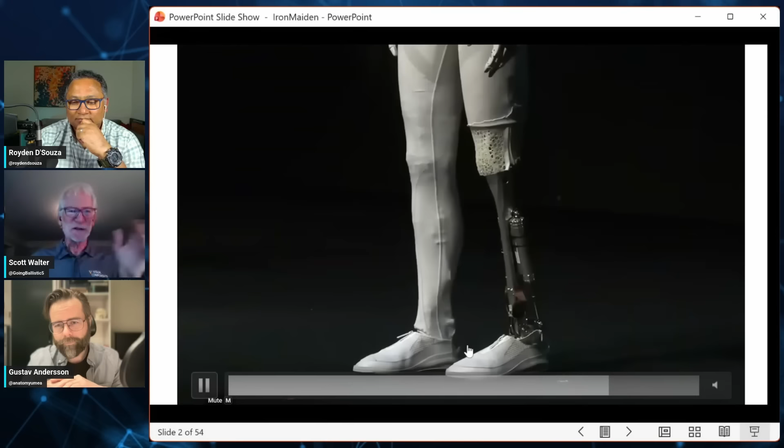You can find this on YouTube - just search XPeng, X-P-E-N-G, and you'll be able to find the keynote and also what they did the next day, showing this.

So yeah, there we go, going ahead and walking off. So the bot's still able to work even with the skin removed.

When they showed it last spring, I think it was, there was a short view of the older version walking, and I was really impressed back then as well. So when I saw this, I thought it seems like a reasonable development.

It's very impressive. The original one was revealed almost exactly a year to this date, so it seems like they always do this on the same day. That bot was just beautiful - aesthetically very beautiful, and the movements of it, everything, were all very good.

It definitely strutted around like a peacock, there was no doubt about it. It just knows it's one of the best walking bots out there as far as convincing goes. It's very fast - we haven't seen it go really quickly, but when it moves, it commands the room, no doubt about it.

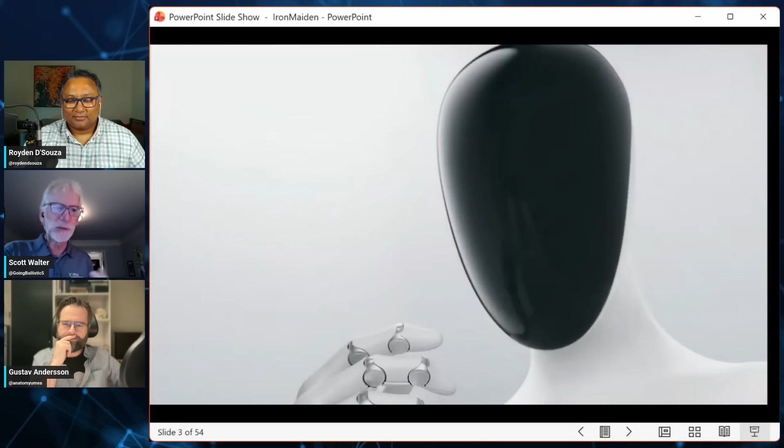And now the Iron Maiden here is doing the same thing. This is the reveal they then had of showing what's inside. Now, this is all CGI, and this is why it makes you think - okay, everything could be in design, but where are they on the hardware?

The first thing we're going to see, and we'll get into this shortly, obviously the hands - there's going to be a lot to talk about those hands because they look very human-like. We can see those are not the same hands as the walking bots - they're very different. We don't really have much detail on the hands yet, but if they actually pull that off, those are going to be very impressive hands.

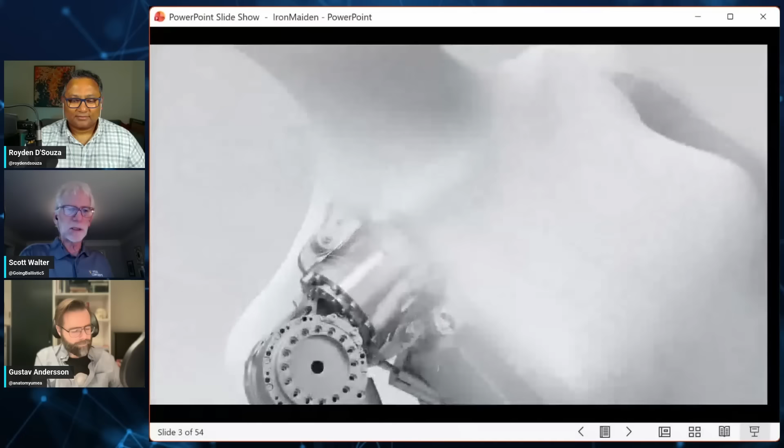We're getting an idea of what's going on underneath the skin, and it's pretty impressive just from the CGI. And of course, it doesn't hurt to be able to see some of the hardware itself, and that's what we're going to get into to figure out what's next. This was like a 3-hour presentation in which maybe 20 minutes was just about the robot - they've got so many other products.

They talked about not a flying car, but basically a type of copter, I guess you could say an eVTOL, that they've been working on as well. So that's also exciting. Yeah, I mean, there's definitely a lot of things.

And of course, just a little bit of background: they also produce EVs and they are working on an FSD kind of chip and believe they're also very close to having robotaxis and autonomy. Their chip, which they call the Turing chip, good name, is the same one they're using in their car and here. So we can see a lot of parallels with Tesla as well, which I found really interesting because it has a lot of echoes of Tesla in the vertical.

Yeah, absolutely. Vertically integrated. But to their credit, they have been working on this humanoid bot project way before Tesla even announced it. I think they started maybe in 2019 or even earlier. So they've been thinking about this problem for a while as well. Does it have the AI in place? Well, that's the thing.

They're working on the same autonomy for cars, and they are also developing their own chip, which might be similar to, I don't know, FSD 2 or 3, we don't know what the level is, but they're doing the same thing. There is this controversy that someone sold the old Autopilot code to XPeng back in the day. It's a claim, possible.

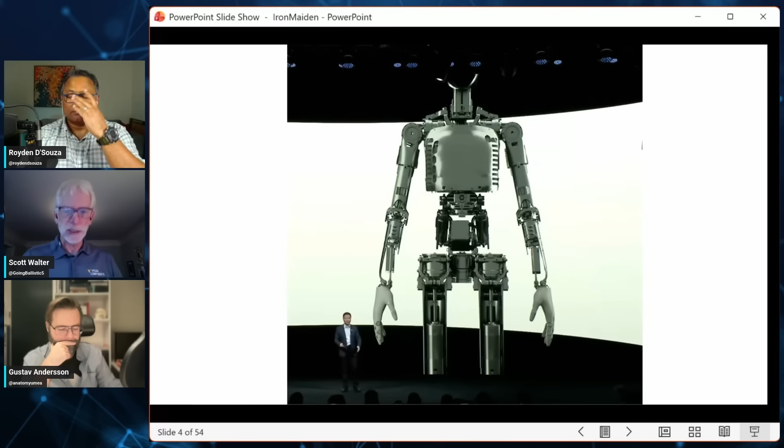So I took one of the frames, made it transparent, and put it over. And you could say, oh yeah, you could probably fit it in there with more than enough room for padding everything, and it would be very hard to see any of the underlying mechanical structure. So I was pretty convinced at that point that it's not a person in there. My only question was whether it was the old one or the new one, and the old one could almost fit in there as well.

It was very close. So before we go too far, I want to refer to a principle that I coined back in the spring that I call the in-out principle. There's the best part is no part and all that, but how do you decide when a part is needed or not? So this is one more level. The idea of in-out is keep it in or toss it out. You try to categorize the function something provides along these five guidelines.

First, the I is indispensable. You take it out, it just won't function. It's like, let's take the engine out of the rocket and see if it works. No, it's indispensable. Sorry, you're going to have a rocket engine in there if you want it to work.

Needed: it will function, but it will severely limit the ability. So there could be things where you find we don't really need a knee in our humanoid robots. They could still walk without it. But it won't be able to go upstairs or down on level.

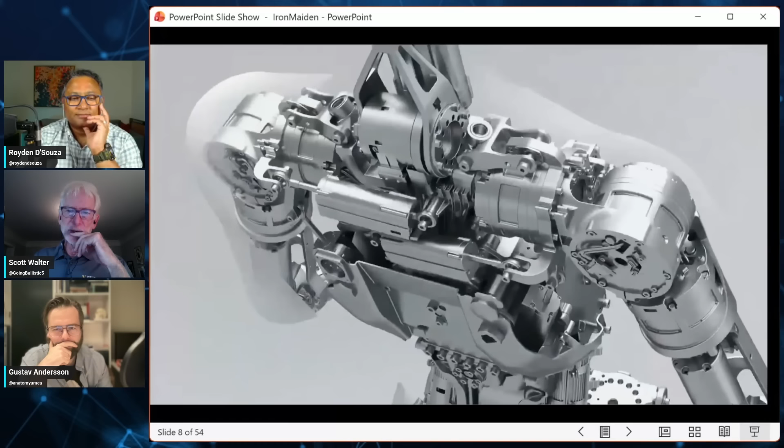Well, not quite. So if we go to the next image I have here, which is the first one where we're going to start, this is quite an interesting mechanism that's in there. You're looking at it, and the first thing is like, wait a minute, what's going on here? I'm working the animation forwards and backwards, so you kind of see what's going on. So we are not seeing the standard shoulder motion here.

We are seeing what is effectively like the clavicle or the scapula kind of moving around or together. So primarily elevation and depression, I'd say. And maybe a little bit of rotation, but you can't really... Yeah, it should be able to kind of. It's hard to tell. Yeah.

Now, if you look at this, can you see the mechanism that allows that, or where the actuator is for that? Yeah, so they're in the back, right, where we would keep our rhomboids, as the muscles are called, but they are not at the same level, which maybe it's okay. I don't know. Well, it means there's an asymmetry, which means one side might perform a little bit better than the other, which means you'll have a dominant arm, like us humans have. But they had absolutely no choice to be able to do it.

However, there's actually one more joint here that may not be seen. So one of them is obvious. Yes. Is that a limitation of the size of these actuators right now? Well, part of it could be the stroke. If they require a certain stroke, we have to make it this long because the motor probably has to be almost twice the length of the stroke that you're going to need. Right. Because you've got all these other things in there. So if you need like a 2-inch stroke, it means you need 4, and that's just how it is. The other could also be, obviously, torque density, stuff like that can also change other things. But when you're going to a linear one, it's a little bit different.

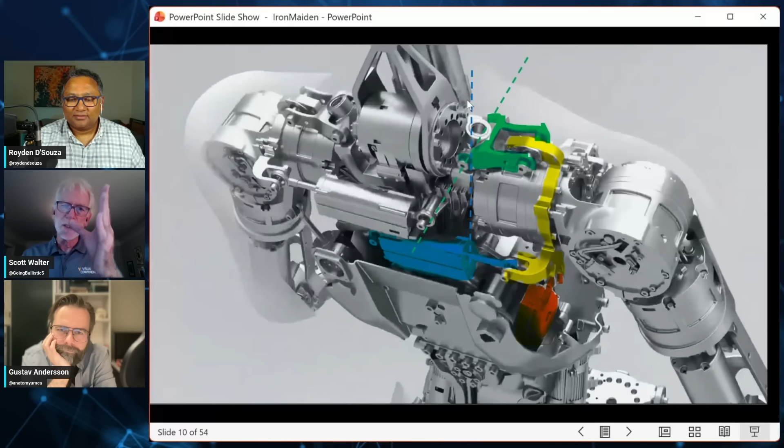But if you look underneath it, you can kind of see that part of that is this linkage mechanism that has an axis on the top, and there's going to be one on the bottom that's a little harder to see from the other side, but it's probably down here somewhere. So it does the hug around there, and then the shrug about the green, up and down. And now let's go. This is definitely not an I or an N. Okay.

Maybe we can class it; it's definitely O for sure. You know, it's something that's optional, but you can argue, maybe is it more like U or T? Is it useless or toxic? Because when you look at all the additional stuff that has to go in there, that's payload and mass and complexity that, if it doesn't have any value, does it degrade from it or not? For me, is it toxic or is it useless?

Because for me, I don't know, it's just so crowded. I have serious questions about the range of motion. Yeah, and if one of those goes out of alignment, you've got a lot of problems. Right, but is it more than just shrugging? Is it just about emotion? So hey, our robot can do the shrug emoji now. Is it about that, or is there more value to it? Gustav, you can probably answer that.

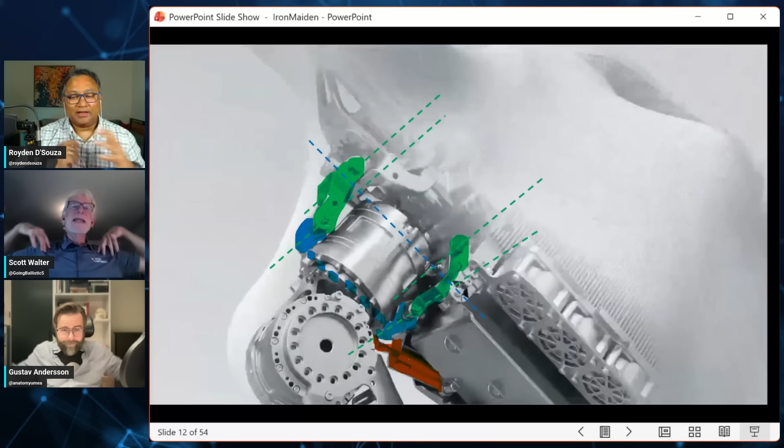Yeah, I'm in the in camp on this one. I mean, you need to reach forward and throw the ball to your kid. You need your scapular movement, and there are conditions where we put the Belgian beer glass in the top cupboard, at the top of the shelf, without having to get up on a step stool. So we haven't really seen whether or not it can do these movements, though. Can it really do this? Yes, but from the standpoint, we have them as humans, and they have value to us.

And the thing is, I ask this question to every single roboticist I meet. My famous questions: which axis would you take away if it was too costly and you had to get rid of one, and which one would you add if you could do it for free? And just about every one of them says scapula. They would love to have a scapula, but they do feel that it's kind of parasitic overall and difficult. But they appreciate the whole point of the scapula.

Now, if I was into robot boxing and designing one for that league, I would put a scapula in there. Not so much that it'd give me a punch, but I might design a scapula which is compliant, so that when I take a punch, it absorbs the energy rather than having it resonate through my whole structure. That might be part of the reason why we have scapulas, but the main purpose is it extends your reach, and could also get you a little bit out of singularity in some locations. So it's not useless in that sense. It is optional because it does provide some benefit, and it would be nice to have because it would make life easier. So that's where I am.

But Royden, this is the whole thing about it. It's not like there's any right and wrong answer. It's about stating your case and why you think it is. And it's what every engineer should be debating when looking through these things: you make your case on why you think it's parasitic. And maybe other people will go, oh yeah, it is kind of making life easier, but boy, I didn't realize there is something degrading the performance overall, and maybe I really don't need it and can do it some other way.

And also, their plan, at least in the short term, is more like welcoming people into the showrooms, and maybe not actually doing heavy lifting and heavy work. It will be more of an expression part, or give me a hug or whatever. Whereas if they're going to lift heavy stuff all day long, it's probably going to be one of the things that breaks quite quickly. Exactly. Because it's going to support everything, so you have to over-engineer it. And remember, it's at the very top of the chain, so it's carrying the entire arm.

All the load of the arm is going to transfer, which is probably why they have those linkages. And they could make those linkages pretty strong. These 4-bar linkages will help, and that's why the actuators there are also pretty robust. They're linear actuators that will be able to give the stiffness that you need. But that takes space, that takes mass, and that mass means it's going to be less safe, right?

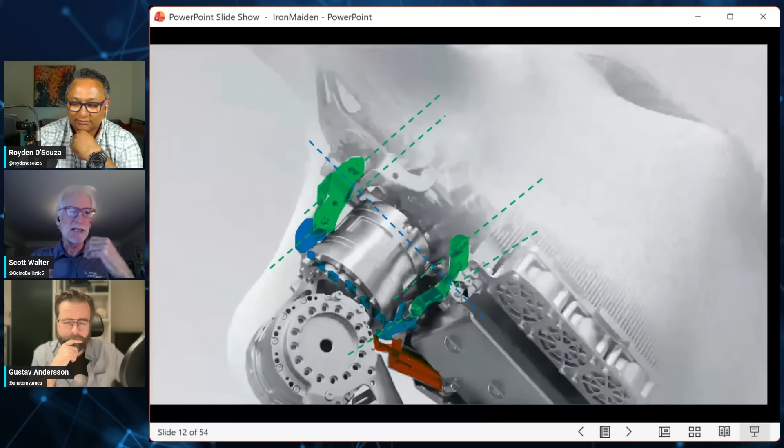So now this is not the first one. I think it's been over a year. There's another Chinese bot out there called TLI bot that I discovered. Someone sent me a link like 2 weeks ago. I looked at it and I'm like, oh wow, holy cow, it's got the scapula, and it had 2 degrees of freedom there as well. Range a little bit different, but still a similar idea. So this is not the first one, and a lot of them are looking at it.

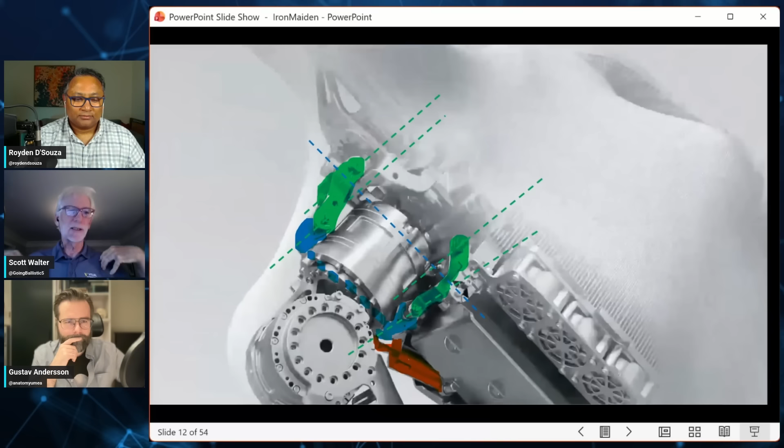I think DLR had something, but it might have been an 8-axis one, as well as KIT, Karlsruhe Institute of Technology in Germany. Both those German institutes. Well, DLR is an aerospace group, basically a German version of NASA. And they also had kind of a scapula light, I guess you would say, that they were able to get to do more or less the hug as opposed to the shrug. Because for many cases, that's what everyone wants to do, is to be able to reach forward.

So moving on, we can take one last view here to get an idea of exactly what, I guess, would you call that the clavicle that's sort of out there? Or I guess that would be the equivalent of the clavicle at the front. Yeah, kind of looks like it, which gives you that nice shape, especially that bodybuilder shape that someone like Arnold or others would have when they get that all developed. Exactly. But the other reason I was looking at it is I'm now going to pivot.

Okay, so I have a question at this point for Gustav specifically, because we keep comparing these bots to the human body, because they're humanoid bots. So there's a lot of features in our skeletal system that have evolved because they're also protecting a lot of parts like our nervous system, our circulatory system, organs, soft organs.

So the entire upper structure with our shoulder blades, our clavicle, our rib cage is also a product of evolution, because it needed to evolve in order to protect the fine, soft, tender organs and other parts of our body which really get us working, which is not needed in bots. Exactly. So you have to be careful how much biomimicry you do.

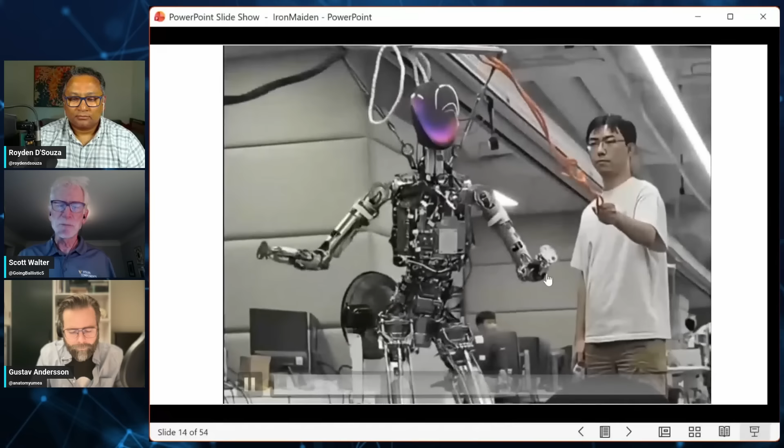A lot of it is like trying to find where the head actuators are. So I think if we look at this video here, this is the closest video that's able to show where there was some movement of the head. And it's hard to really tell because the body's moving as well.

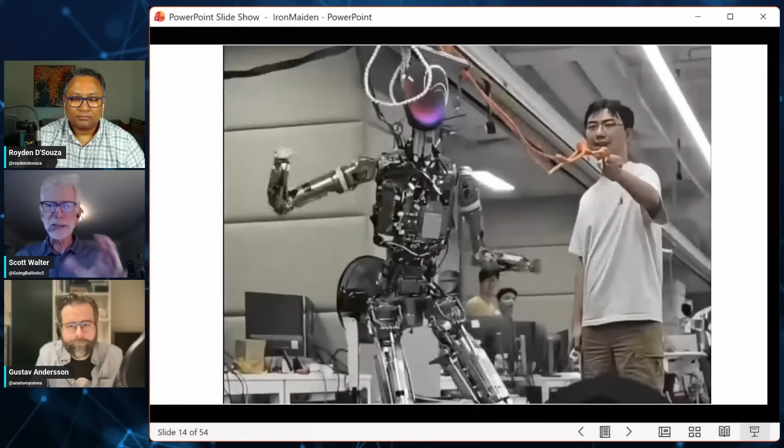You're not sure if you're seeing the head move because the body is moving or not. But I think I see the head definitely doing the X back and forth, which would be that side to side nodding or the maybe. And then I think I might see it rotating in the Z up in the cranium, not necessarily down at the neck. Hopefully I'm not being fooled, because that's kind of changed my calculus and thoughts of what's going on, but it's made me even more confused.

I don't see the chin moving up and down so much on the Y axis, but it can do it. It could be an optical illusion, because there's another one where you can see the chin going around. So it depends on where you want the pivots - do you want all the rotation in the head, or do you want it to move around? We're going to see that the rotation you're looking at is looking forward. The chin may not go down, but the whole neck can because of the rotation.

But first I want to focus on the Z. Right down here where I highlighted it, it looks like there could be an actuator down in there, which I could not see from other views. I looked at it, it's there, but it means it's probably buried way down. Hopefully it's not taking up space, or is that just an attachment point? I'm not 100% certain, and right now I'm leaning towards not being sure about that rotating there, because it appeared like the rotation was happening up high and not down low.

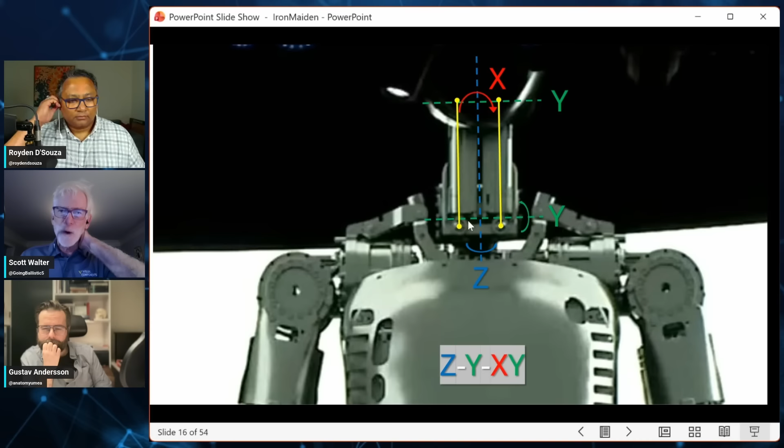So this is sort of what I think it has - it's got a rotation along the Y here, and that's clear. We're going to see that actuator that sticks out. I'm not sure about this one here, and we see what appears to be two linear axes going on up there. You can make scaffolding and structure that's a lot thinner and doesn't look so hefty. The only reason you wouldn't is you're doing the same trick as with the wrist and ankles - you've got a cardan joint up there that gives you two rotations. The rotation would be a second one in the Y, and also the X would be nice to have.

So it's like, okay, that's interesting - and then they must have the Z down there. So I thought it was a 4-axis joint. But one of the reasons I don't think it's 4 axes is once you add up all the degrees of freedom, I come up with 83 DOFs, and they're saying it's only 82. So that means - and all the other DOFs I'm 100% sure about, except here - it probably is only 3 DOF, and it's doing the Z rotation up there.

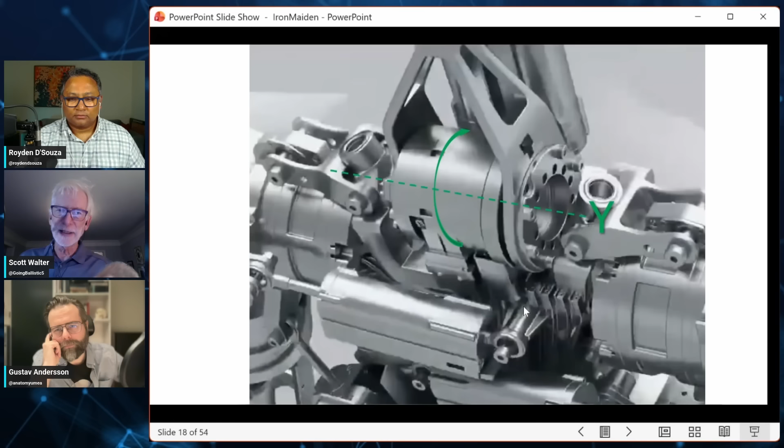Yeah, so we'll look at some of the other pictures here. I'll take that away so we can see a little bit of the highlighting in here. So when we go and look around, we'll see the others - is it the same actuator? You see the dark slot on this actuator that's further down, that's moving the scapula. It looks like what you're having in the neck. So the dark slot - yeah, it looks like that. It looks like one of those, exactly.

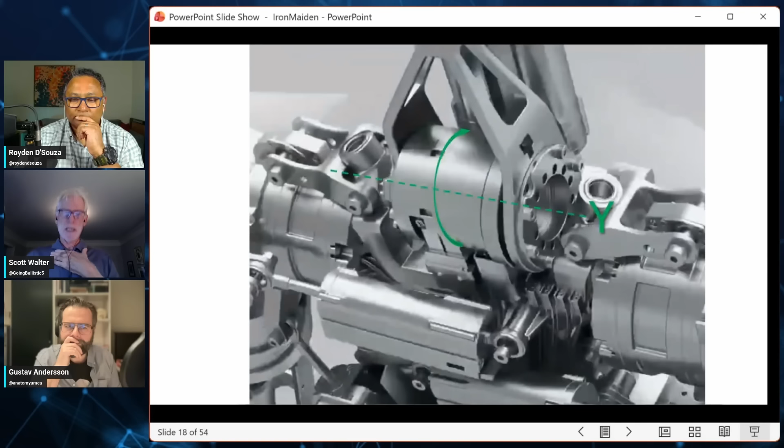So it kind of looks like this - you can see this big actuator here. That's the Y, that's the one making the head lean forward, and that makes sense. I don't think you really want your head to go down like this, because you don't want to bury your chin in your neck to look down. You want to crane over a little bit, so your field of view is a little better. But that's a big actuator - look at the size of that thing. It's built to carry something massive, and your head should not be that massive. That's a pretty big one.

And again, I was looking down here and I could not really see another actuator for that Z rotation, and I think that front view was tricking me a little bit into thinking that. So when you go over to here, really - again, I don't quite see what's going on there. And you're looking at that, and it's like, again, I see two linear actuators.

I see what looks like maybe a Heim joint or a pin joint there. Could be just that they're a pin joint, and it's pretty big if it's a linear axis. So I'm kind of highlighting what's there for you to get an idea of what possibly could be there. So I could be fooled a little bit.

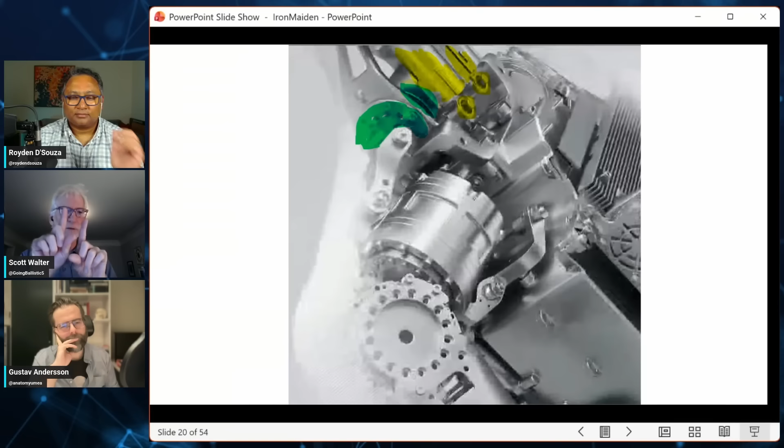There's a couple of ways they could be doing it. It's not really a quadrilateral that they're having for it, or you could just actuate one side. One could be a dummy, just going up for some reason to give you that X back and forth. And then it's got a big actuator in there, which is the one that's rotating around, which is why that Z or Y actuator has to be so big, because it's carrying a heavy neck and something heavy in the head. Who knows if they've got other processing or stuff in the head that also adds a little bit of mass.

So I was just looking at that overall and a bit confused. I'm going to lean towards they've got a Z rotation in the head, though I can't confirm it because I can't see it, and they're doing something tricky to get the X. But this yellow part there is kind of throwing me off. Well played - we can see it's a pin joint there that they're actually able to get something out of, and I can't figure it out. So bravo to the XPeng engineering team. I go down in defeat.

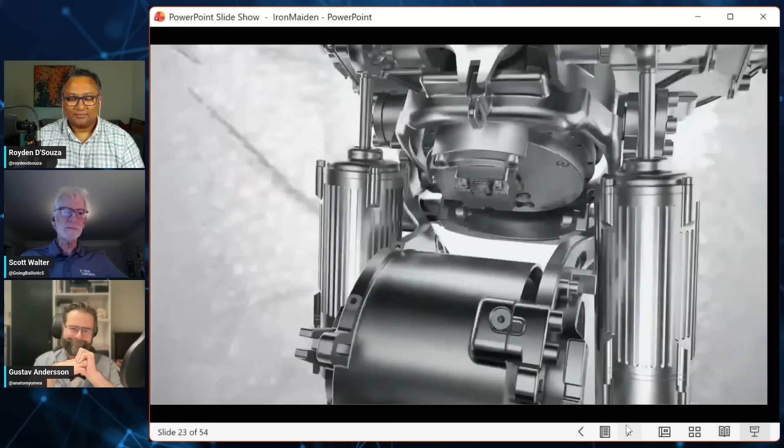And again, so we can kind of see what could be going on there, the kind of rotation that's happening up there. Now let's move on to, if we want to start talking about in and out right now, this gets wild. Because this is the waist. That's some serious hardware. Yes, this is the waist.

So let's take a look again, showing how the waist is going on. Now I'm going to let it run long enough that you guys, and hopefully our viewers, will be so familiar with this kind of mechanism. You've seen something like this more than enough times. Is this a kidney style waist?

I mean, what would happen if you only actuate one? So the kidney style waist is technically an RSU - rotational spherical universal - which means they're using rotational actuators for the kidneys, because the kidneys are like these nice little round things up there. Do you see any rotational axes there, actuators right now? It's if they are very high up in the image. Yeah, I mean, that's the only place I could imagine that it's at. Well, they're there, but there's something else.

But we definitely see linear actuators. And as we go through, I'm going to contrast it to the old one. So what I want you to see, there's a bunch of things going on here that I think are really going to get pointed out. The first big structure you can see in the metal is basically a cross that's in there. That is like your universal joint or your cardan joint right there, which has two axes, which I'll highlight. And then you have the actuators on the side, which aren't going differential right now, so you can only really see one motion. But when it does the movement, it's exposing another actuator that will be pretty obvious, and also one that's down here.

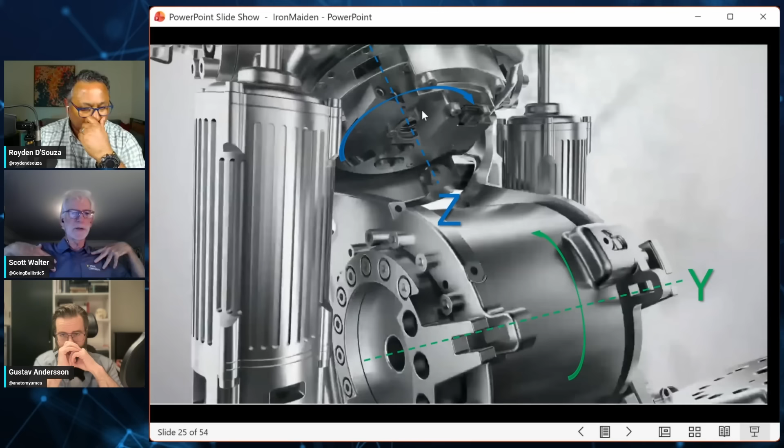The motion we saw was purely these linear actuators on the side. And so this is the parallel actuation strategy that is giving us a couple degrees of freedom. So what we can see is that green actuator that was down there is giving this Y rotation, which is basically allowing the bot to lean forward. And then you get this Z actuator, which is taking the upper part of the torso and rotating the whole upper part of the torso.

Now we have to take this probably a little bit further and actually look at the overall structure, because there's yet another Z actuator that we couldn't see in there, and that's way down here in the pelvis. So down here in the pelvis is a Z actuator. Here's that Y actuator that we were looking at. We get the parallel actuation, which creates an X rotation about that cardan joint, and also the Y. Basically, we were seeing the Y, we were not seeing the X, and then a Z up there.

So now look at this. So this is my serial parallel notation. So it's Z-Y-XY-Z. So how many letters are there? 5. Of all the waists, I think the one with the most degrees of freedom I ever saw was like Phoenix, and that was just a render. I don't think I've ever seen it live.

Most of the others go anywhere from 2 to 3, with this kidney style waist being kind of popular. Boston Dynamics is doing it, LimX is doing it. Figure One did it for the very first one, but then decided not to. And also LimX, these guys, and Unitree. Unitree has it. Now, it turns out those kidney style waists, as much as they're nice for being able to get that XY and it's very compact, they have mechanical issues. Part of it comes down to the actual tie rods that are going on there.

But for the most part, everyone's saying 2 degrees of freedom or 3 degrees of freedom. That's been the debate. These guys are going for 5. Why are they doing that? Any idea? Well, okay. So the first thing I want to do is compare this to the original Iron. The original Iron, you see, it is your classical kidney style waist, and it's only 3 axes, 3 degrees of freedom. Now, the CEO has mentioned that the reason why this bot's able to walk that way is because of the spine.

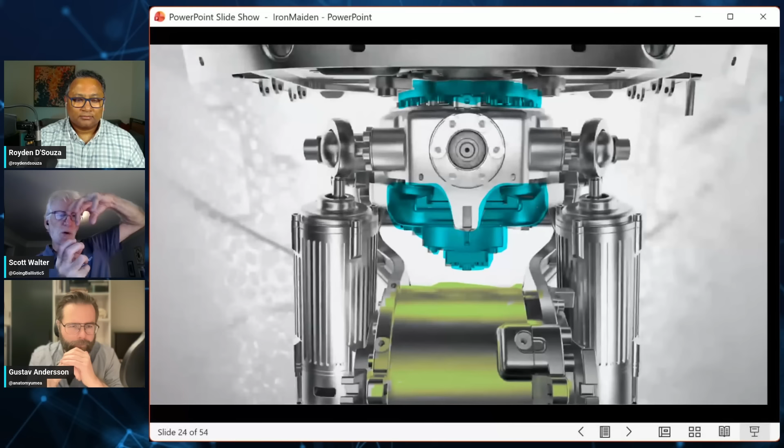Now, I can either turn a nut and make my screw move, or I can turn the screw and make my nut move. So if I take my screw and actually turn it a little bit, it's going to create an offset that I don't want. And there is a solution to this. And if you actually look, Tesla has done that better in the actual bot than what we see in the demo showrooms.

Because the way you solve it is the shaft that's coming out, you don't make it circular. You make it square in shape. And that's one way that when it comes out, it cannot turn in that direction. So I'm really surprised, because again, that is going to cause a little bit of wobble, and it's going to make it very difficult for you to see what's going on.

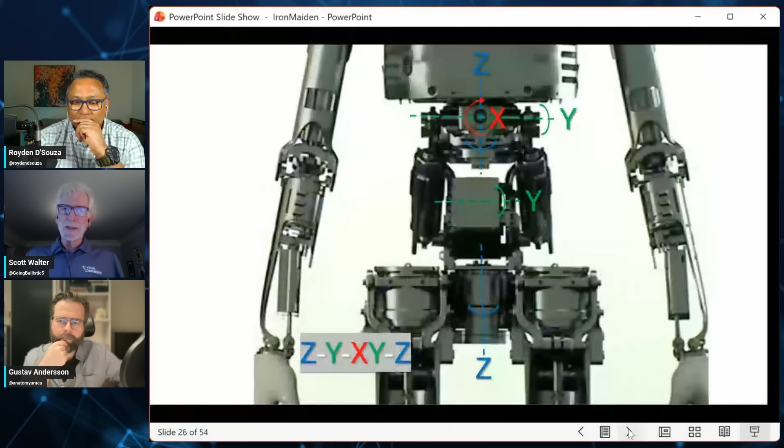But I believe going with this solves what might be some of the problems that others are seeing with their kinematics as being actually the failure points for the robots. That's the thing that's causing the most downtime. Yeah. Okay. And we're only halfway through. All right. But then again, I can't help but wonder about the life of these. Yeah, that's what it comes down to, the friction these robots are dealing with.

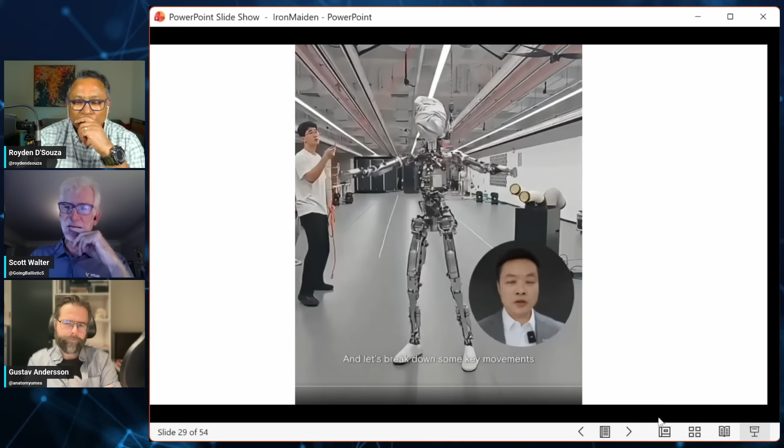So I think, all right. I'm going to just go ahead and mute that.

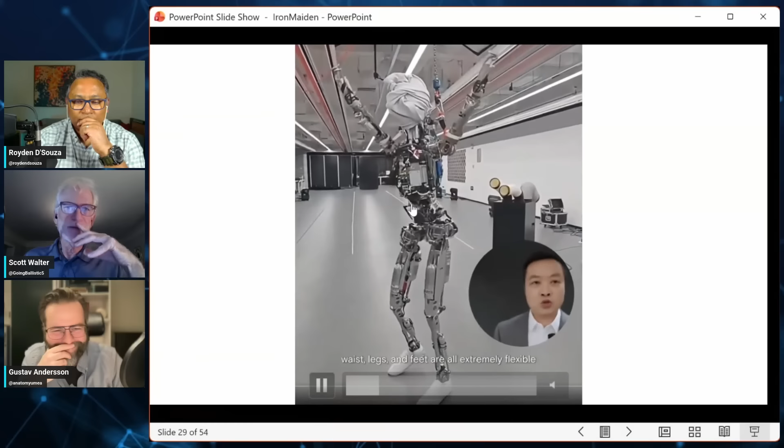So now here we see actually the bot with all the skin covering off, so we can see it moving around there. I'm not sure, that could be a human head in there. Because they've covered it up, I think we should be very suspicious that there's actually more going on. The movement of the hips is really impressive. Yes. I think about what you said about the spine. If you don't have the spine, then the whole thorax would kind of tip over. So that's why you need it.

You will have people arguing, yeah, but you can do that with 3 degrees of freedom. Do you really need the rest? And it's like, maybe you do to be a convincing human. If you want to twerk, you need the spine. Yeah, I think you need the whole thing. So I'm glad that they played around with it, because it's causing me to reconsider what degrees of freedom you need. But again, if you're just putting it on the factory floor, we don't need to twerk. And again, it's going to be a failure point, potentially.

When it comes to doing actual useful work, they don't really need this to move boxes around. But if they do this and develop the actuators, will that push technology forward so that the same type of design can in the future be used for heavy work? Or will there still be a durability issue? How do you see those kind of things? Because I don't really know. Yeah.

That's the whole thing, you got to experiment and find out. If no one takes the brave step of testing it, we're not going to get that data. It's easy to sit here in our armchairs and hypothesize all day, but in the end, someone's going to go out and try it. And I'm glad to see this. I don't know that I would encourage other people to do it, it's like, wait and see how it goes. But if you are Disney and you want humanoids walking around the parks that are convincing, yeah, this is what you have to do.

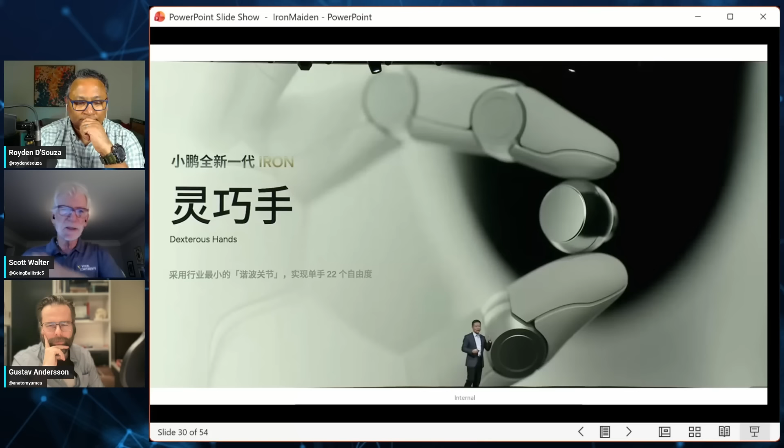So the hand wasn't ready. So all they could do is show the CGI of what the hand is going to be and just talk about it being nice and saying it's 22 DOF. And we know nothing more than that. All we can do is speculate. So this is one nice image of that. And what can you glean from this, Gustav?

It's a CGI thing. I like that they appear to copy the hand with the MP joint. We keep talking about others putting the MP joint too far out. So here it's actually hidden beneath the skin. Too well hidden. Yeah, too well hidden. Probably it's going to be tricky. And it's hard to tell, but it looks like the fingers are different sizes.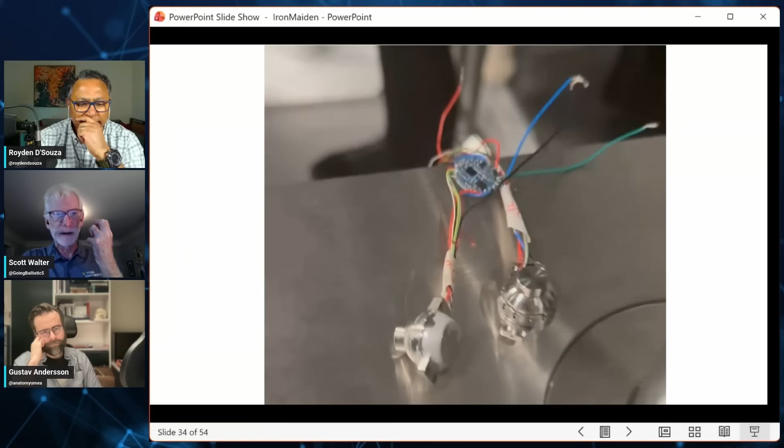And the thing to remember about the Tesla bot hand that we saw, it was able to play air guitar. And we kind of know it can do air guitar, even though we've noticed that its fingers don't curl up quite correct. But there's a big difference between playing air guitar and playing the real guitar. And that is like the pressure and everything else you have to put on there. So I'm not convinced that Optimus could play a real guitar at this point.

I'm not convinced that this one would be able to do much more than convince us it's able to do all the gestures. How many different gestures are out there when they show the hand gestures? I bet it can do all those. It just can't actually do it in practice. No. Where do you think this would rank on the Kapandji scale?

Well, since we can't really see where it's going, if it's moving here at all. But since they're saying 22 DOF, it should be able to reach at least some way across. But the only way you could cheat on the hand is if somehow you include the wrist in there, but most people don't. How do you mean? They don't. They couldn't because they're saying 82 degrees of freedom. Oh, okay. And 22 there.

No, strike that completely. They're counting everything with the digits. They are not including that. Otherwise, they would get to like 80 DOF and not 82, or 78 actually. And I'm pretty sure I've counted all the other DOFs correctly. So yeah, that's all there. Unless they have a bunch of the other metacarpals that are just kind of moving around a little bit, but if they're getting the full movement in the thumb, they should be able to get a 10 on the Kapandji.

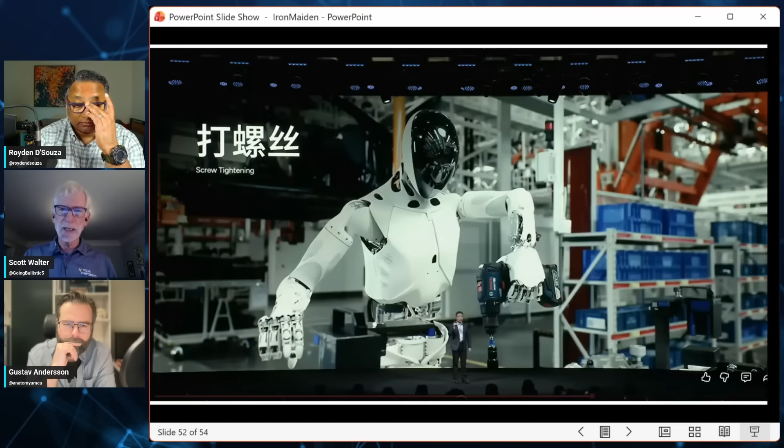And it's just because of the vibration of using a screw gun or tightening, which is like, wow, that's amazing. So they're like, we're not going to put it in the factory right now because the return on investment's not there. You're still better with the humans. And then he talked about, guess what? We're not going to put it in the home either. And he had a bunch of reasons, from safety and stuff like that. The fact that your homes are very diverse, and it has to get to know your home.

And I'm like, well, wait a minute. That's going to be part of the intelligence. I really think that's not the hard part, the fact that your home is diverse and it doesn't know it. It will map it really quickly.

It's just lifting up a knife like that and cutting is going to be very hard. So he said that we're not going to do that right away, partly because it's very difficult from the autonomy, but we're going to go right to this, which is tour guides, salespeople, and receptionists. And none of them have to carry anything. All they have to do is point their hands, and their gestures have to be very human-like.

So again, no payload. That hand is going to be nice, but I don't think it's going to be a functional hand, is my guess. No? I mean, functional in a way that it can move, I hope. Or do you mean that it's just going to be a solid hand? It's just that I wouldn't use it to bring in my groceries. I just don't think it'll have the payload capability. It may not have the dexterity. Maybe it can play a soft piano or something like that, but I'm not convinced that those micro drives will be able to give the grip strength that you would need, and then of course the durability and everything else.

And they're literally shrugging their shoulders and saying, we don't care about that, because if it's just about pointing and doing stuff like that, you don't need that grip strength. What they're going for is that you really think that's a person in there.

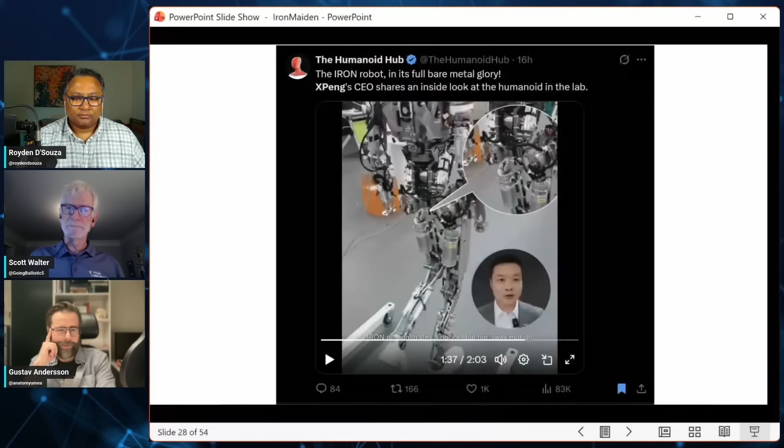Yeah, I mean, you don't have to. Tesla has the approach of we're going to do everything ourselves. They just provide the hardware and then someone else provides the brain, perhaps. Honestly, if you look at the entire presentation, I think the wow factor was the catwalk. Yeah. And you want to know how it did that catwalk? And now we're going to figure out how it did the catwalk. But if you take the catwalk away, how much substance is really there?

The thing to remember is that, as we're going to start seeing, the original Iron used a lot of linear actuators. Actually, they added even more linear actuators than I expected. The original had a rotary actuator in the elbow, and now it has a linear actuator like Optimus. In the waist, they got rid of them. There's a little bit of change in the pelvis, but they're kind of embracing that.

We have yet to see a linear actuated bot walk really fast or run. They give us hints that they might be able to dance and do a few things that make you think, oh, that must mean it can walk. But no one has demonstrated that. Apptronik hasn't shown it. Tesla hasn't shown it. We haven't seen it here from Iron. And also Neura. None of them are moving fast.

So if you want to convince people that you are very human-like, one way is to do these exotic kung fu moves or other stuff, which some people would say is so superhuman they can't believe it. A catwalk is very slow, so everyone is focusing on how realistic the gait is and not realizing it's not very fast. It was very much because they leaned into their strength, which was all this dexterity and swaying, taking your mind off the fact that it can't walk very fast.

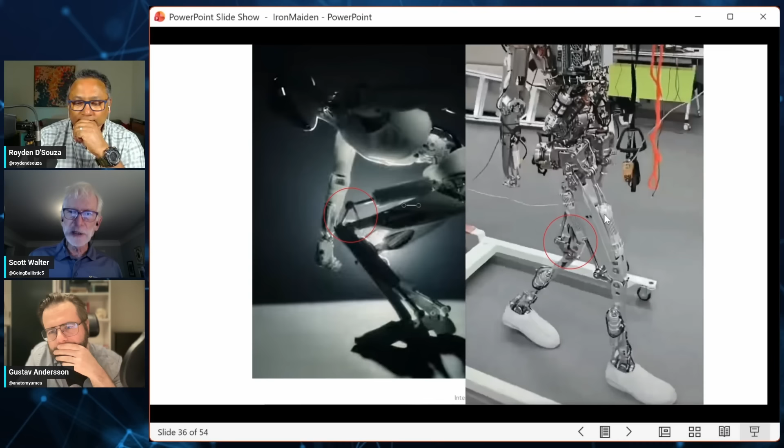So they switched the order, and you can see this inverted Hoekens mechanism is now down in the back part of the knee rather than the front. And this actuator we see over here in the front is actually going to be the flexor now. We're going to see the change they made there.

Okay, so as a result of that, we can sort of see them, again, poking out in the back. And sure enough, because I was wondering what's that pokey thing coming out there at first, and when I finally saw that, I was like, great—because I was wondering where that was coming from. And it's very clearly from that. That's the other reason why.

This is why I wasn't 100% sure it could be the first one, because you see how convincing the kneecaps are. It's like the only way you can have the kneecaps is there can't be anything there. And now this little white thing you're seeing here, that's actually from the dolly—that's not part of the robot.

There is nothing there, so they can put the padding there and you wouldn't see anything. And I'm thinking, but if we go back to the original one, that thing's going to poke. There's no way you're getting away with the kneecap there, making it look real. So we can see sure enough, it fits in there. And again, we can see the silhouetting along here where you can sort of see parts of the calves and everything else. So that's what they've done to change up the knee.

Also these actuators seem to be a little bit smaller than the original one, so either they're more powerful or they don't need as much because they've changed things for other reasons. Again, if we look here at the calves, we can sort of see how slender they are. They're the same that we see in Tesla. The original iron was also done this way. This is what's known as the SPU kind of joint, spherical prismatic universal. And we can see it poking out here just a little bit, feel it closely. And they put some nice padding back there because you see there really is nothing behind there, so they had to put some padding to give you the illusion of a calf.

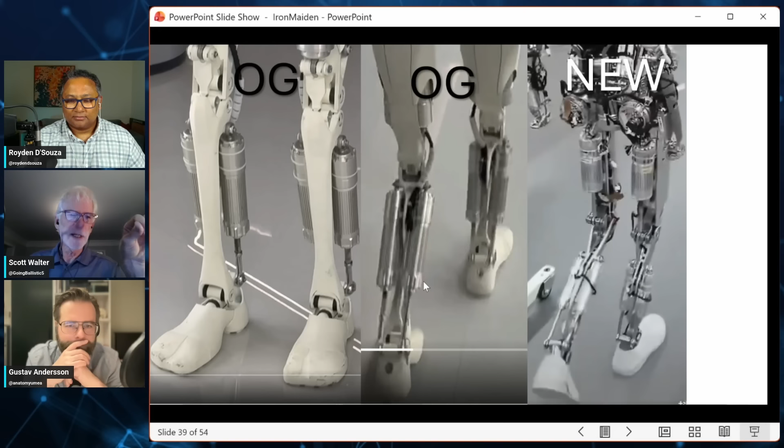Here's the OG, these again are from Frederick Lambert's video, I was able to grab them, thank you very much. These crocs look interesting because it almost looks like a split toe in the original one. I wonder if they did something down there to help a little bit with compliance. I don't know how much of that is actually part of a toe box. I don't think the new one has necessarily that split toe. It seemed to have a little bit of a compliant toe box, but it wasn't obvious, we weren't really seeing it the way we see in others. But we can see that these calf muscles, if you want to think of them that way, are much thinner, way more elegant than they are in the original.

Now the fun part. So this is the OG, this is the original iron from a year ago, and this was like a nice image that someone took at a trade fair somewhere. I was having a hard time figuring out what was going on because the silver piece you see here is actually like a plastic piece they put in there for shipping, to keep it in place. It's actually not part of the robot, it's just there to make sure it doesn't swing around. So you have to realize that, don't let that trick you and fool you, because when you see other images, you realize it's not there.

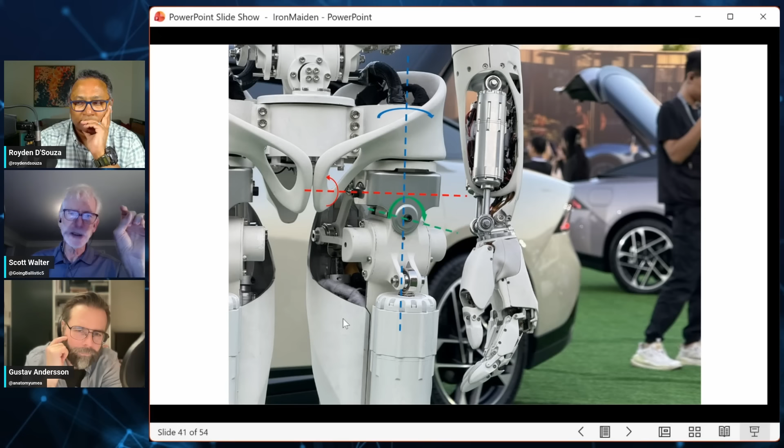And the way this thing works is you have a rotation at the top, so basically it's an RAF. So the rotation is first on the Z here, and they have a cardan joint, which gives you the rotation here that would be like your flexion, and then also abduction along here. And it's not obvious, but there's actually two linear actuators. This linear actuator is part of the knee, there's nothing to do with flexion or anything else. So there's a linear actuator back here where we can kind of see the mechanism that kind of pokes up here, there's one on the other side. And through that, same strategy that we see in the wrist and everywhere else, differential actuation will give you the abduction, together will give you torque sharing on the flexion, so it means it's going to be really strong on that.

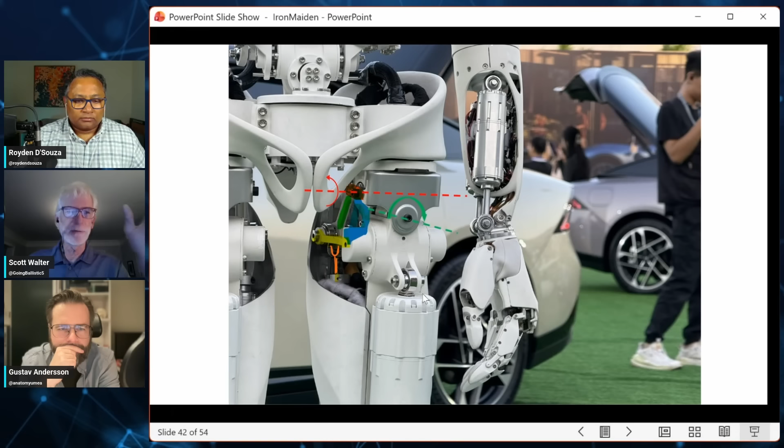So it's very similar to, I think, what Apptronik does, something similar to this - rotation first and everything else after. And as we know, everyone's gone to the Figure approach - they're going to say, wait a minute, what we want to have is flexion first. On the new one, it's a little bit hard to sort of see here where everything is, everything got changed.

And now, Royden, you're finally going to have your question answered. This green part here, the abductor, that is the buttocks. That's what they had to put a lot of padding around. And it's not something they put there to make it look like it was human, it's something they had to figure out, how do we put it around there so it doesn't jut out so much that you realize it's actually a motor there. So that was probably pretty tricky for them to do. The abductor is a really big one, it's a really big one. Now the difference is that Tesla has one, Figure also has one, but Tesla's is up very high, it's almost in the small of the back.

So if you tried giving Optimus a buttocks, it would be like, why is it in the small of the back? The same problem with Figure is it's low, down in the leg itself, and it wouldn't look right. They have it in such a natural position that you could trick someone. So I don't think Figure or Optimus, the current ones, could fool someone to that extent, because you would notice there's something a little bit off with the movement.

But that's right there, so that means A comes first, R comes second, and then F comes third. So this is an ARF, which is pretty much actually the same as Optimus, but there's something they've done a little bit different. It's almost the same up there, and again, this rotation here is new. So they took out a linear to put in a rotation. That's the only place where they threw out a linear to throw in a rotation that they didn't have before. Otherwise, they've been throwing out rotaries all over the place.

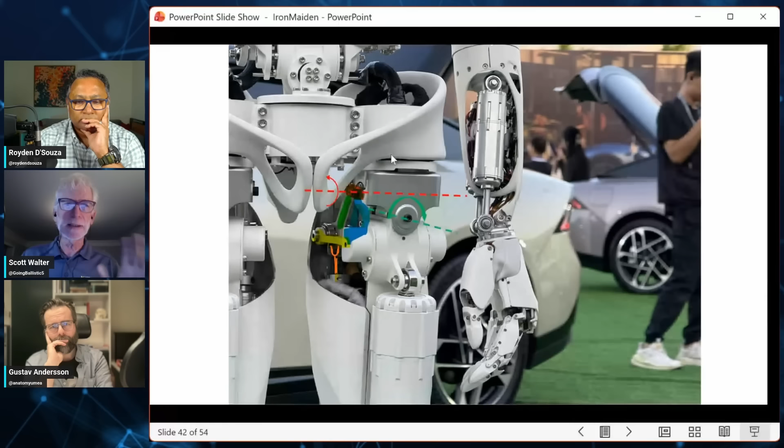It's rather interesting. I think they realized it was a design aesthetic and not there for engineering reasons. And since they have this new fascia subcutaneous muscle cover, that will do the trick instead, probably. Exactly, everything that they need for that.

So the way they actually actuate all these things is the A actuator produces that joint itself, and the same with the R, so both form the joint. Now the flexion is happening at that point right there. And again, this is the 4-bar mechanism that forms the inverted Hoekens, now activated here by that particular flexure. And that's how that's done.

Now, it's very similar to Optimus, but the difference is they managed to get that flexure up very, very high, and in Optimus it's very low. That's why Optimus seems like it has its butt up in its lower back, because it's really down deep. And that's why it would be very hard for Optimus to trick someone by putting a suit on it with a person inside, because you'd notice where it's articulating just does not look right. So they get that up higher, which is kind of what you'd like to do anyway.

It reduces the overall mass of the movement. The only thing, and I think they have no choice but to do it this way, is that I would almost invert this mechanism and put it up there, because in a sense you're moving this very heavy mass more distally rather than proximal. But it might just be that it doesn't make sense to actually turn that mechanism. In theory, you could have it up there, riding along there, with that shaft pushing down there, and then you lift it up a little bit higher.

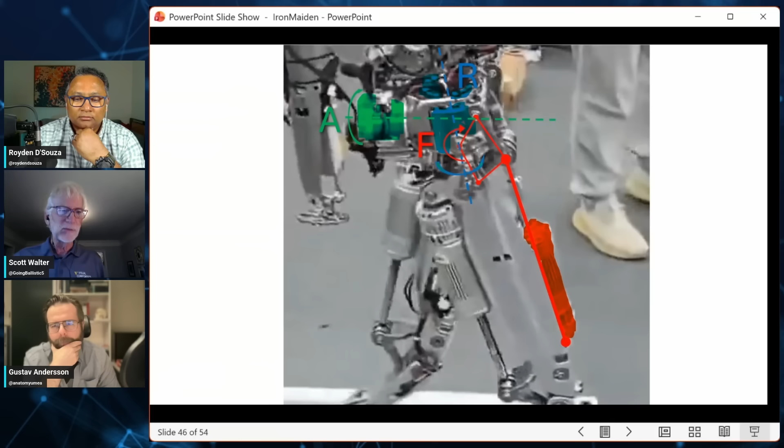But they may have decided for packaging reasons or others, or maybe it just didn't occur to them. But I would move that up, because in a sense, Optimus made the same mistake. Their whole idea of doing an ARF was that now the flexure doesn't have to carry the mass of the A and the R actuators. But now you get this really heavy actuator practically down by your knee, adding a lot more distal mass than you should. So in some ways, they almost shot themselves in the foot by taking that approach.

And it's the same thing. So that's the only downside of it. But you can see it moves very well, but it doesn't move fast. And so again, some more shots here. So if you had a hard time understanding, you can kind of see them in there, how it comes out. And you see it fits in just neat enough in some cases when it goes back that it doesn't poke out too much. So they really managed to get the silhouette right.

And again, a close-up of that mechanism so you can see that joint is up pretty high. It's almost in line with the abduction. And if you can get that in line with the abduction, you've done a really good job. I notice those massive actuators also kind of, you know, the grace in the human movement of the hip as you walk, the tilt.

If you go back to the previous slide, yeah, do you see those big actuators? I think that's kind of one of the main benefits of this, I would imagine. What do you think? Yeah, it really shows the tilting of the hip, or the pelvis, with those. Oh yeah, especially with everything else going on up there.

So you really have to think it's not a pelvis and a waist. It's an entire structure that you have to integrate, because there is a transition from one to the other, and part of the waist rotation is built right into that pelvis anyways. So the more you think about that as something that's totally integrated rather than different subsystems, the more likely you're going to get a more natural looking gait.

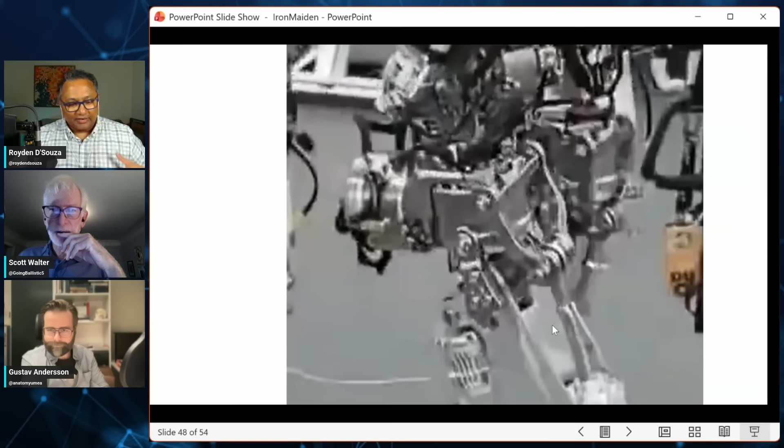Yeah, a lot. But I mean, look at this. The center of that is like a solar plexus. It's kind of like... Whoops. Let me get back there. Yeah. It's structural. I mean, parts of it are probably just to kind of make it look like our muscles.

I mean, for the arms, for instance, they don't really need to do the compartments that we have, but it's a nice look, and it probably adds to the natural look when they add the cloth on top of it as well. So it's a kind of cloth. It's 3D printed. I would like to see other structures that would almost have some sort of cording that goes through that might have a little bit of tension that you would be able to build in, and that might really help a lot of the walking and everything else.

So you can have this external compliant system that absorbs a lot of things and again smooths out a lot of the motion. So how thick do you think this is? It gets pretty thick in some places. Yeah, so when they had it through, it was quite tricky. It was, and if you look at it, it's probably thin in others where it kind of matches the structure really well. In others, there's like big voids.

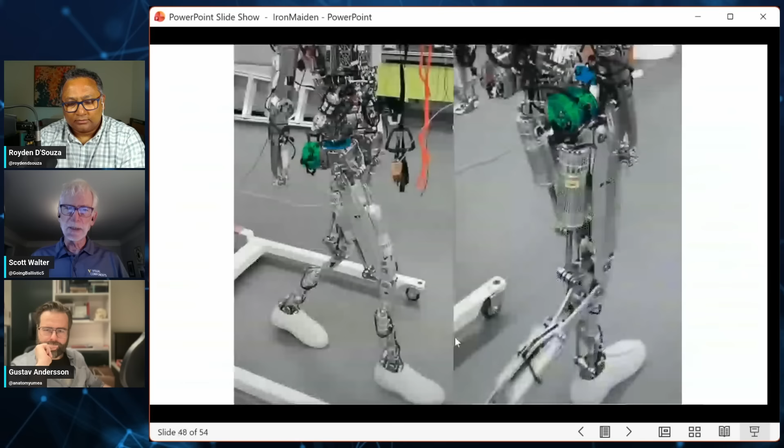If you think about the void that was in there, I probably have to go right back to the very beginning. So let me get all the way back up there where we get an idea. And okay, come on, previous. Let's keep on going up here. And it was this one right here. So you can kind of see that they probably had to build in a lot in some places, and others would thin out.

Yeah, and I mean, it might be that they have further things that we can't see, kind of like the pubic bone that we saw on the old model. It might be that they added that underneath this bionic covering. There could be some. Yeah, and that might be what was sort of tricking me, like you say, there could be a structure built into it that provides a little bit more protection in the overall movement.

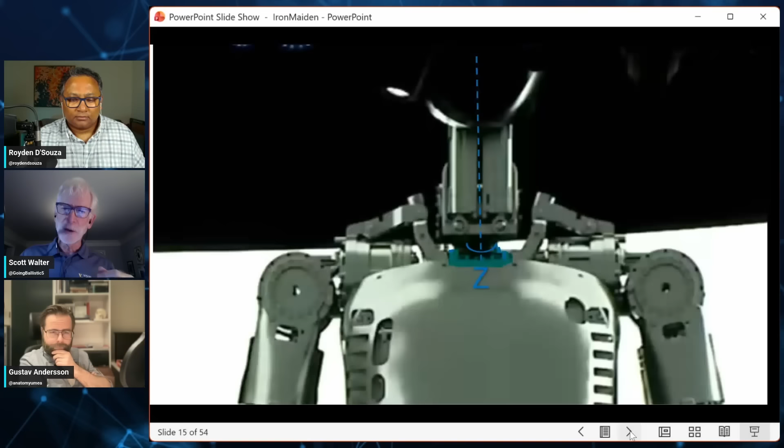But I'm not sure if they were thinking of fascia, if they were thinking of it for completely other reasons, or if they were just thinking of the covering. So if they haven't thought about the fascia, they might think about it a little bit more, that, hey, you can move ahead there.

And again, so this is what our fascia does. Basically, it's a sheath or band of fibers, connecting material that does all sorts of stuff. So chat about it, or do a chat on it and learn about the fascia, because I think that is going to be a very, very important part for the next generation of bots. And that's the end of my presentation, believe it or not. I think we made it all the way through.

Wow. Yeah, I mean, it's like the skin on the sausage when it comes to the muscles, but then there are different layers. So you have the one that is closest to the individual muscle, like your biceps will have its own, but then you have a thicker fascia that kind of covers the whole entirety of the arm. It splits the front and the back. So it's definitely there. It adds problems at times if you have compartment syndrome. It's due to the fascia not giving way to increased pressures and so on.

Yeah, so it's a source of a lot of ailments. It could also be the source of a lot of cures. Yeah, because if you can figure out how to get your fascia back into place, it can solve lower back problems and everything else. Yep. I think one other problem is that sometimes the surgeons don't understand the importance of the fascia, so they'll just cut right on through it and don't realize that you might want to put it back intact a little bit better.